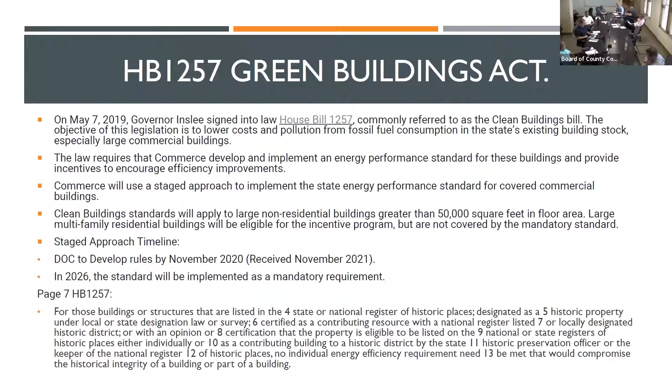Next slide. So we started out doing this - we created a team: myself, Michael, Ken Moore, and Frank from the county projects group. And we're actually working with some of the building owners so we can really see what makes the most sense for the long term.

I have to go back and look at when I came on board here 6 years ago. I had a couple windows replaced over in the Public Works building, and that was 6 years ago. At the cost I had for those, I started working up a project for Scott.

At the time, River City came and did the replacements. I took the number of windows and wondered what it would look like from then till now. So we did a count on all the windows on the south side. If I would have replaced them at that rate, even factoring in a snorkel lift and other equipment, it was going to be about 185,000. I had it quoted, and it was 750,000. That tells you what 6 years have done, especially supply chain wise.

So it's been a huge increase, but I think that's why we really want to take a look at infrastructure wise, what we can change. So we're working on that right now.

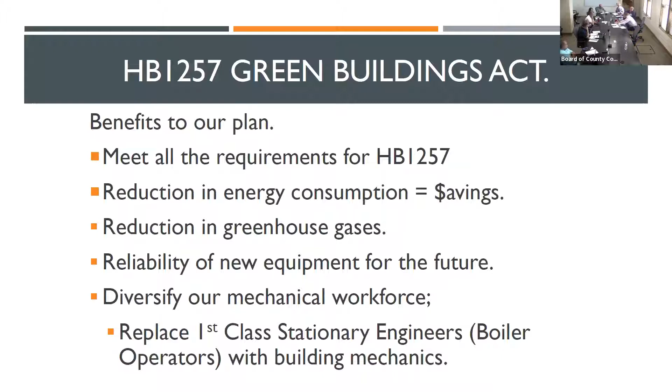We'll take a look at some of the energy systems we really need to address. A lot of these old systems have more efficient alternatives available now. You guys might remember the month-long heat wave we had the summer before last. We slowly started to lose ground on our chillers. Even though we have plenty of capacity, we didn't have enough refrigerant cooling capacity, so we were adding cold city water to our cooling systems and flushing it down the drain just to keep our systems operating and keep the jail, juvenile facility, and courthouse cool. So we've found something there.

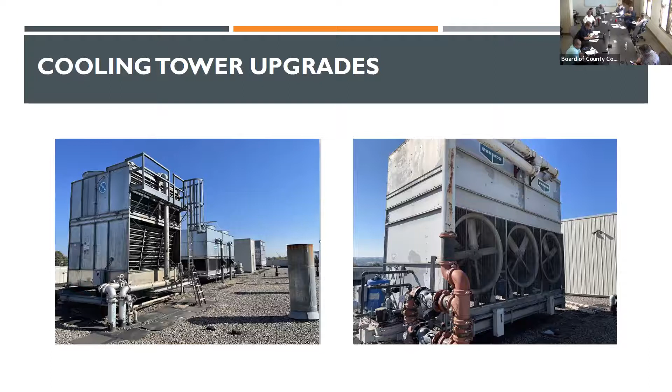The need for steam, like back when we had the old radiant systems, is when they would run 3 boilers constantly. We just don't see that now, but we do always maintain the entire distribution loop at high pressure for a small amount of steam, which is actually coming at a cost. We've tried to go over with the city about potentially reducing the code so we can bring the pressures down. The problem we've found is that the system itself gets kind of cranky when we start cooling it down and heating it back up. So that's why we're looking at replacing these systems.

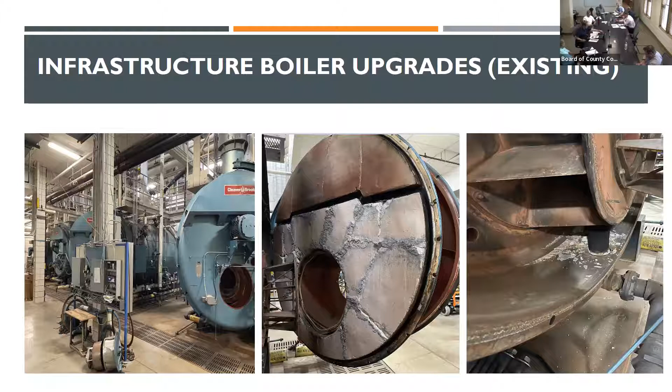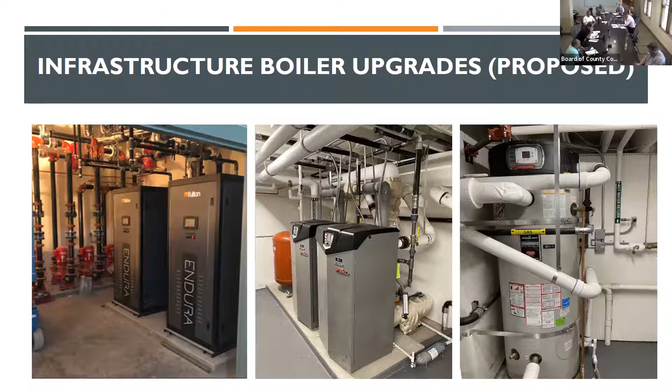Next slide. So what we're looking at are the 2 systems we installed in the medical examiner and the mental health crisis stabilization facility, both just over 20,000 square feet. The systems we'd be looking at are a little bigger, but these are redundant systems, so you're never down—you always have that insurance policy. These systems, based on usage, can throttle way down, stay in a warm-up position, and then react immediately. We can use them to heat hot water. These new high-efficiency units are similar to what's being used in all new construction right now. The best part about this is on the next slide.

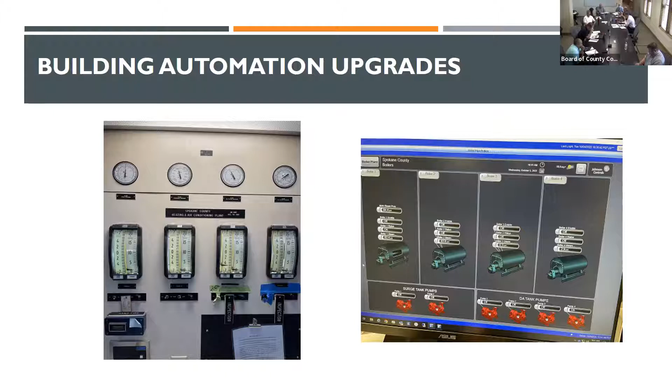6 years ago when I got here, that picture on the left was our building automation system. What you're looking at on the right is where we're at now. We've made leaps and bounds in our infrastructure for the way we monitor our buildings and our steam. We've come a long way, we have really good control, and we're actually looking right now at metering our building's energy usage in real time. We're really getting to that level that we want to be, but we still have some steps that we need to take. Next slide, just want to go over it.

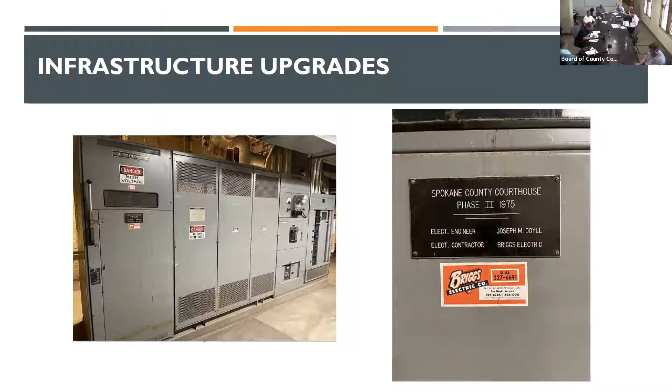Main lobby public works, 4th floor public works. The main lobby public works - we're actually working on a project right now to really see, for public works customer-facing entities, what fits best there and what that would look like. We've got a team together with public works groups, building and planning, and some of the other departments. We're taking a really good look at what would fit best over there.

I have the windows on the south side of public works - they are delaminating. Unfortunately, I did file a claim on it, but it was denied because they're over 25 years old. But I tried anyway. They are starting to fail, but it's unusual that it is mainly the south side ones. We believe the seals on them are breached because some of the tinting is wrinkling, which tells me that we're getting air inside of them.

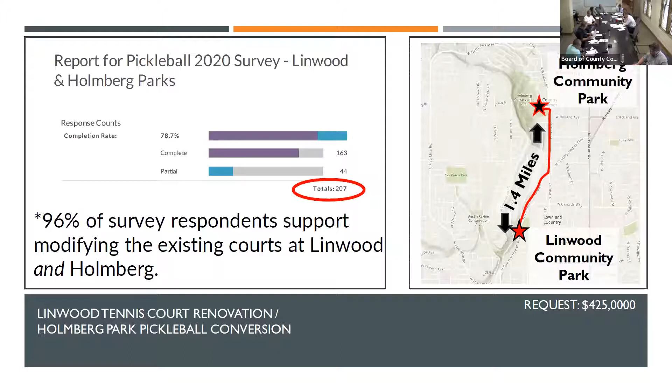And so the project resulted in converting existing dilapidated courts at Holmberg into 8 pickleball courts, and taking the existing Linwood tennis courts and renovating those to serve as tennis courts. These would go where the old pool is at Holmberg Park. Would that be the next phase? That's more of the expanded vision when we get to master planning, but this phase would only work with the existing tennis courts that are there right now.

But yes, in larger plans we've looked at use of the old pool site as having great potential for that. And the folks are very excited, and that was a lot of the feedback in the survey.

Rather than have, say, 4 pickleball courts and a tennis court at each park, the direction from the community is that it would be much more beneficial to have a greater number of courts in one location, looking ahead to even more for tournaments and events. And the folks are really crazy excited about pickleball.

They really are. If you've been out, you'll notice in some stores that just sell sporting goods, you'll see pickleball paddles and balls, which is something I've noticed just in the last year or so. So the demand really continues. As I've mentioned, we've carried this over a couple of years, but the interest continues, the calls continue, and so we're excited to have this on our list for 2023.

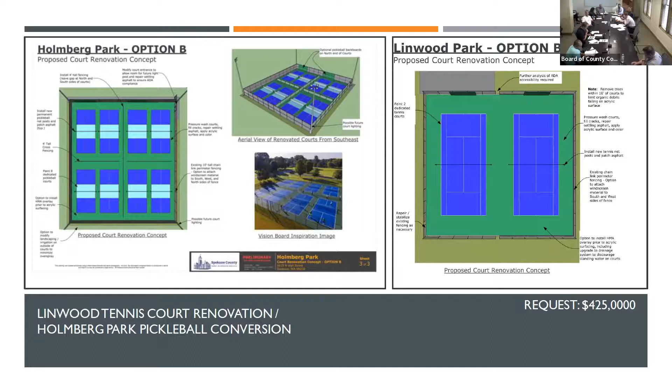Next slide. And that just summarizes the ask there. If this were to be approved, we would start working on the permitting in winter and go forth from there.

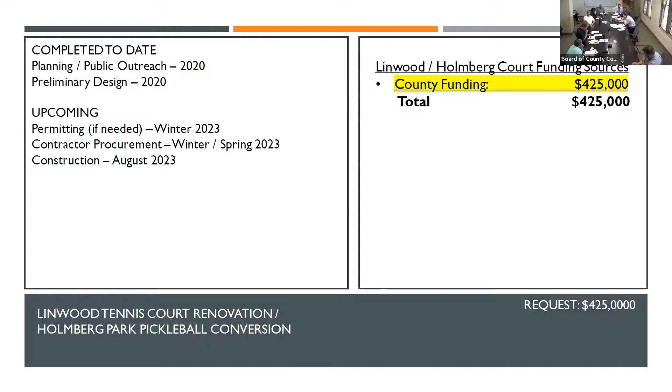Okay. Next project. Looks like I'm up. All right.

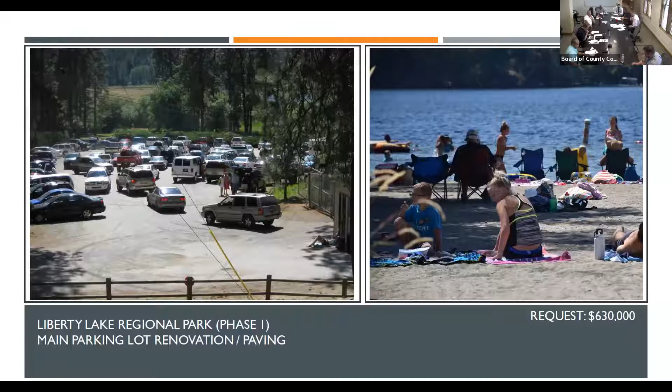So the next project is our Liberty Lake Regional Park main parking lot renovation and paving project, which is a component of our phase 1 renovation out there at the park and a carryover from our 2022 capital budget request. This is our number 2 priority on our list of requests this year.

Next slide, please. So if you recall, back in 2016 we received a $50,000 anonymous donation to fund the development of a master plan for the park. That plan, which was ultimately approved by the board in 2017, included addressing the main parking lot shown there on the left.

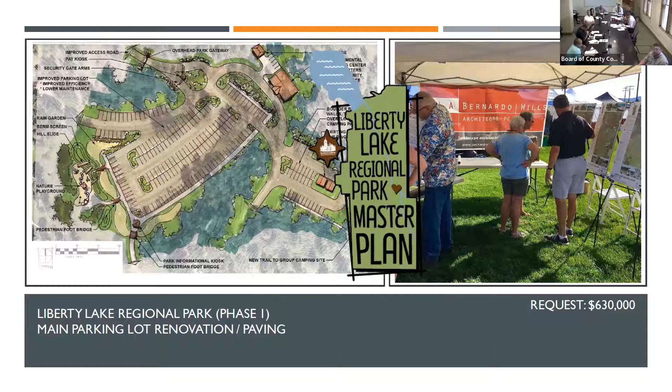Next slide. So in 2020, we developed a grant application to the Recreation and Conservation Office to help fund portions of the phase 1 envisioned improvements, including a new expanded dock, new restroom building, accessibility improvements, and new shade structures at the beach. The main parking lot was excluded from that initial grant application to maximize the competitiveness of our grant submittal.

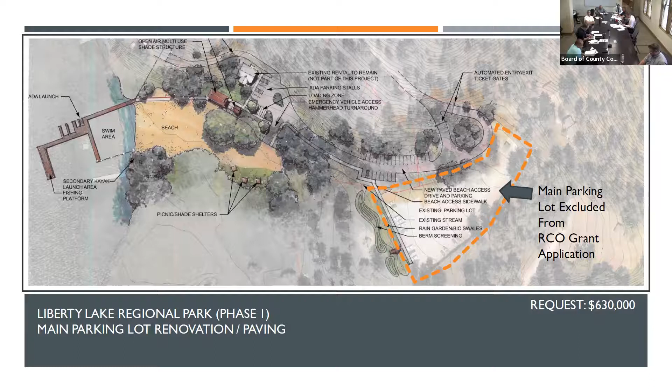Next slide. So earlier this year, the budget office was able to advance us $70,000 of the original $700,000 for the main parking lot budget request to complete design and construction documents for the lot concurrently with the phase 1 design work. So as envisioned, this project and budget request involves paving, striping, curbing, and associated stormwater improvements to support the renovated parking lot.

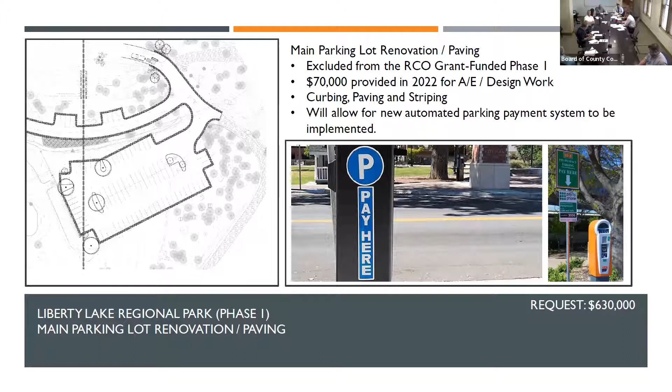Next slide. So we are currently at 30% design with the phase 1 project, while the environmental permitting is moving along nicely. We are anticipating that we'll be in a position to bid this project out in spring of 2023, with construction beginning in mid-August as public use starts to ebb out there. So again, thank you for providing the original grant match funding for the phase 1 project and the $70,000 in design money for the parking lot. With this additional $630,000 request, we will be able to complete this phase 1 project. Any questions on that?

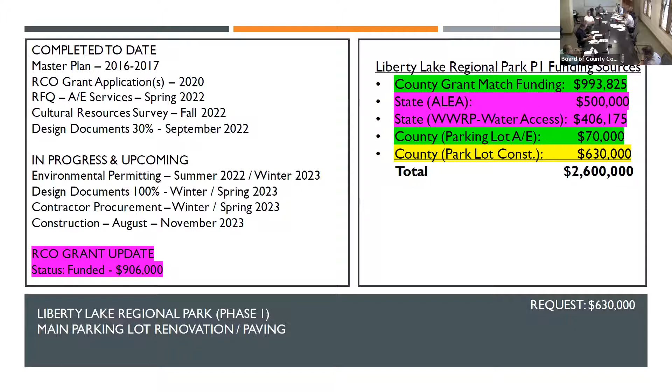Okay. Next slide, Ron. Okay, staying at the same location, this is our number 6 priority on the list of requests. Maybe number 5 now, I don't know, with plans being pulled out.

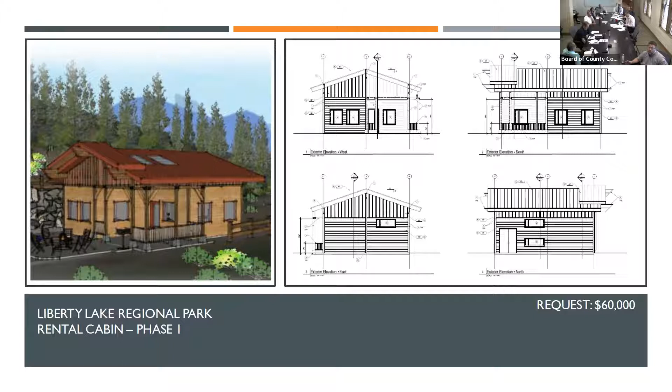Okay, good. So our next request is for funding needed to complete phase 1 work on the newest cabin rental shown here. This cabin was designed by Bernardo Wills Architects and is intended to meet demand for rental cabins at the park. Currently we have 11 tent sites, 20 RV sites, and 4 cabin sites that compose the campground. Per the master plan, we are to continue to provide for a variety of camping options.

Rental cabins are a hot trend for overnight stays, not just through Airbnb but at federal, state, and local campgrounds nationally. Similarly, the Liberty Lake cabins are extremely popular and generate more than double the per-site revenue as RV sites, helping to offset operational costs at the park.

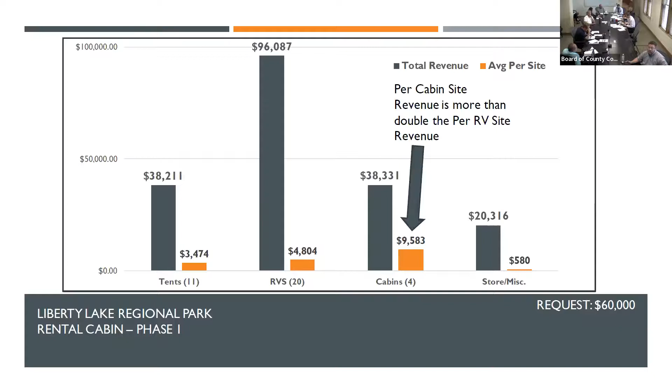In summary, this request for $60,000 will allow our operations division to move forward with phase 1 construction of this cabin, which includes site work, foundation, framing, and weatherproofing. Any questions on this project or request?

Okay, I'm turning it over to Doug. No, Paul, not so fast, before you go. Sorry, I've got a cold, so I'm not talking well. But on the funding, are you looking for general fund dollars, or is this REET 2? It's REET 2, that's what they're signaling. Should we all just say it out loud? Everybody's whispering it, nobody wants to just say it. REET 2, Mary. Like Doug wants to say everything, he's the only one who gets to whisper.

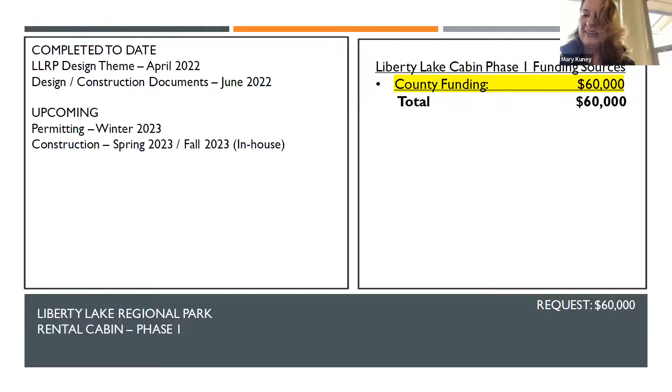Okay, thank you, next slide. I'll start by saying this is the one and only project on our list identified for REET 1 funds. All of the other projects are identified for REET 2. From a priority standpoint, this is our number 1 ranked project.

For the last 25 years, this building has served as the headquarters for the Spokane County Conservation District. Like the land it sits on, this building shall officially become Spokane County property at the end of this month. County Parks is very excited for the opportunity to relocate from our existing administrative offices, located just north of this building on the slide. The new site will provide additional space and is much better suited to accommodate our administrative staff, with storage for existing vehicles and equipment not currently available at the present location. Additionally, the move would help enable implementation of the 2021 master plan for Avista Stadium, which identifies use of the existing admin building as a necessary component to meet Major League Baseball's 2025 mandates.

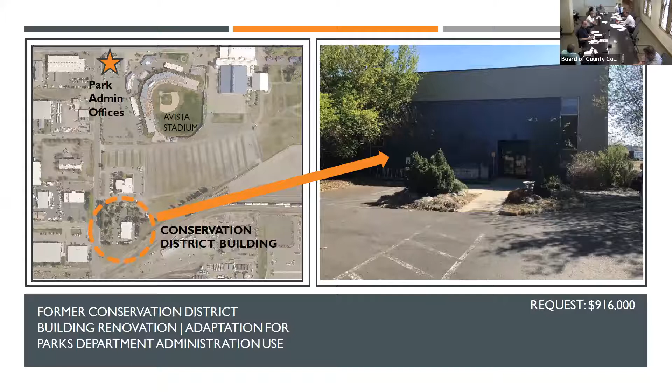Doug, is that the extension branch just directly north of the site? Yes, is that okay? Yes. Absolutely, just wanted to make sure.

While the building itself is in relatively good condition, County Parks has worked together with county facilities to identify improvements needed to clean up and secure the site, to utilize it safely and more efficiently. Much of what you're looking at in this slide would be removed to clean and open up the space. The photo on the left is what you see adjacent, running parallel with Havana there, and some of the other areas.

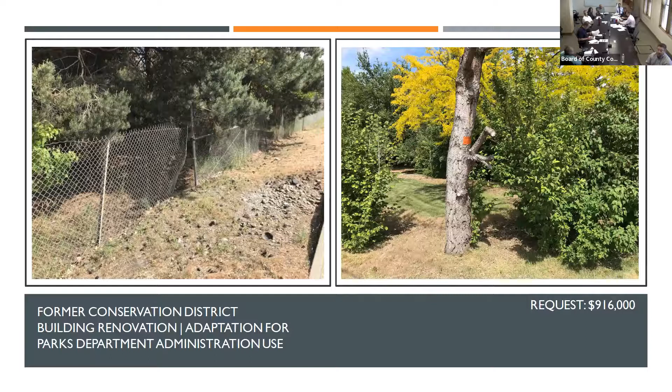This slide just contains a few photos of the existing conditions inside the building.

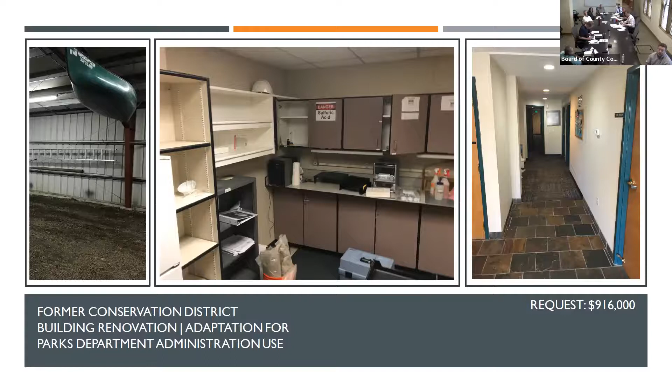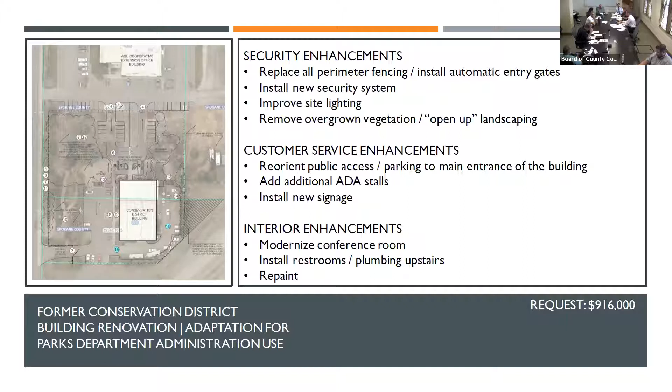On this slide we've outlined several items identified for the renovation. We've put a lot of time into analyzing the space, both outdoor and indoor. Security is a key component here, given the current failing infrastructure serving the site, the fencing, the overgrowth, and the location of the site. We've outlined specific improvements: security on the inside, modernizing the conference room on the main floor as well as on the upper level, where there's an even larger conference room great for public meetings. One thing the building is lacking is restrooms, so we propose installing restrooms on the upper level to serve the conference room and office space there, plus a basic repaint, since overall the building is in pretty good shape.

In summary, the ask is for $916,000 to allow us to move forward with this project, and we'd look at moving right away. We're in conversations with facilities, given that the site's being turned over to the county, and we're hoping to move forward sooner rather than later on general cleanup of the overgrowth, working with Gil. This would be a general fund building that facilities would essentially maintain, so we work closely with them and would continue to through the improvements. Happy to answer any questions on this project.

Doug, would there be any other people occupying the building? We don't have others at this point.

We've looked at a bigger picture that could potentially allow for a centralization of operations, or short term, there could be some ability to house additional persons at the site. So it really allows a better space for our current employees and for future either expansion or consolidation.

And how long will it take physically to move you from where you're at to the conservation building? I think when we drew out the original timeline, we were targeting 3 to 5 months. A lot of that depends on availability, but there's a lot of small projects and expertise, like the security fencing and security enhancements, where we would be able to utilize the small works roster rather than one large project bid out. As we talked to them and looked at this project, we would see a series of small projects, so that could allow it to proceed more quickly.

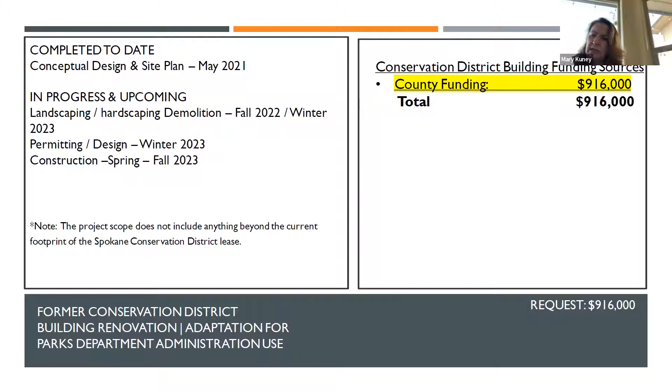And partly was the vandalism that was partly when it was empty versus when they were occupying it? Is that correct? That's what I understand. No, a lot of it, and some of the challenges Gary has had, have been while it's occupied.

Either vehicles where the gas tanks are being drilled into and drained, or other challenges Gary's recently had over there at the Cooperative Extension, with folks walking outdoors and being confronted by individuals that don't have business there. They've had some vandalism to vehicles during daytime operating hours, as well as off hours. So there's been a steady increase of vandalism and criminal activity, and we have tried to plan accordingly to provide a safe and secure environment for staff to work in. Thank you.

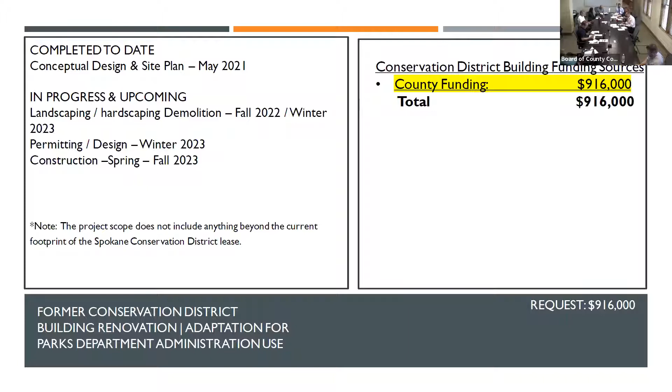Okay, on to the next. I think we're ready.

Okay, Bear Lake. This is our number 3 priority in the list of requests this year. This funding request is associated with a local grant match requirement for a grant application submitted to the Washington State Recreation and Conservation Office to help fund shoreline renovation and enhancements to Bear Lake's east and west shoreline areas.

You may recall that back in 2020, we installed fencing to block off public access to most of the west shore to address risk management concerns associated with gabion basket retaining walls that had reached end of life.

As a reminder, this is a heavily used regional park in North Spokane County with over 700 vehicles entering the park daily during peak summer months. It is the only public lake access of its kind in Spokane County north of the Spokane River, with other lake access points in this part of the county being for boat access only. So it's really important to this part of the community up there.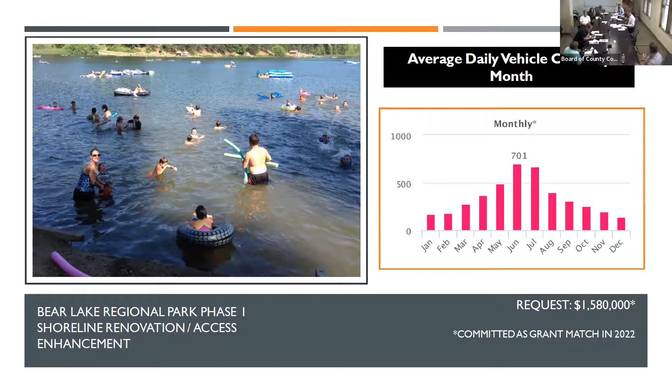Throughout last year, Julie Neff in our office did a great job leading a master planning process to develop a phase 1 master plan for the park focused on the shoreline areas to get us to a grant application ready status. Through that process, there was extensive public input solicited through an on-location meeting as well as several online surveys, as you can see here.

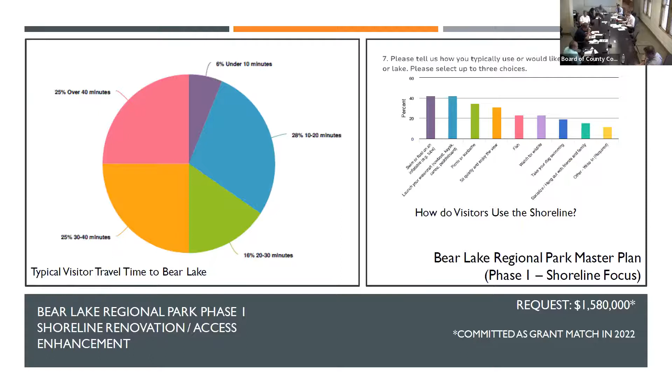The community preferred design includes significant public access improvements to the east and west shoreline areas, including removal of the failing gabion baskets along the shoreline, enhanced lake access for swimming and viewing, expanded fishing piers, and a new non-motorized watercraft launch.

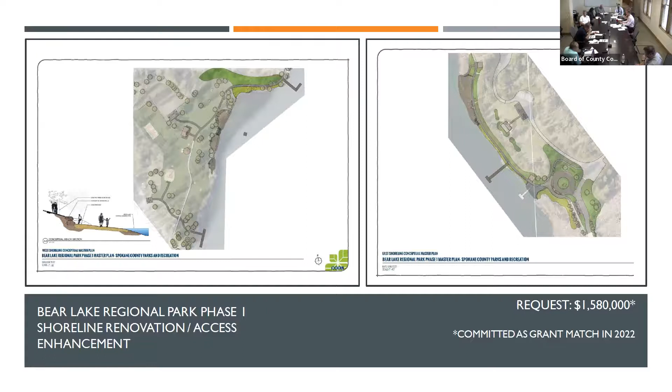With the phase 1 design at 60% and environmental permitting well underway, Julie was able to submit a very competitive grant application to the Recreation and Conservation Office, which is currently ranked 8th out of 25 projects within the grant category and within the funding range that we anticipate. Providing this committed match funding in 2022 will allow us to advance the design documents to 100%, secure that permitting, and put the project in a position to be fast-tracked for this grant funding.

Any questions? One element to mention for the grant funding is whether you're ready to go.

Yeah, so that's something that we found out recently - this state grant funding source is land and water conservation funding, so it's a federal funding pass-through. What the state does is look at projects within the full 2-year range of funding and fast-track those that are ready to go from a permitting standpoint. That's why we would like to get the ball rolling, because otherwise it would potentially push that federal funding to 2024, and we wouldn't be able to begin construction until probably fall of 2024.

Any other questions? Okay, so you're looking to try to get that identified sooner than later, the 1.5?

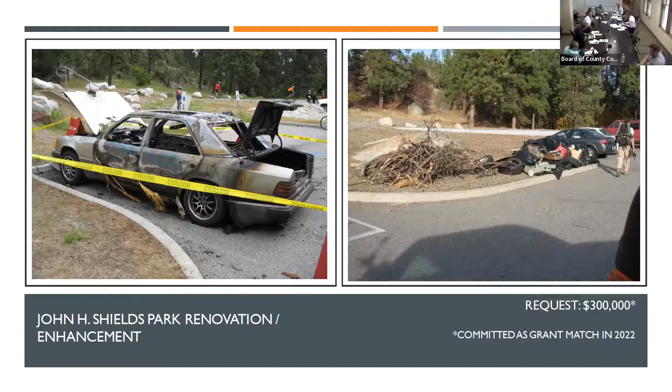All right, next slide please. So this project provides low-hanging fruit opportunities to address accessibility, connectivity, and activating space currently seeing misuse and causing some security issues out there. As you can see here, connecting the park with the Centennial Trail is a pretty straightforward project that's supported by our Public Works Department.

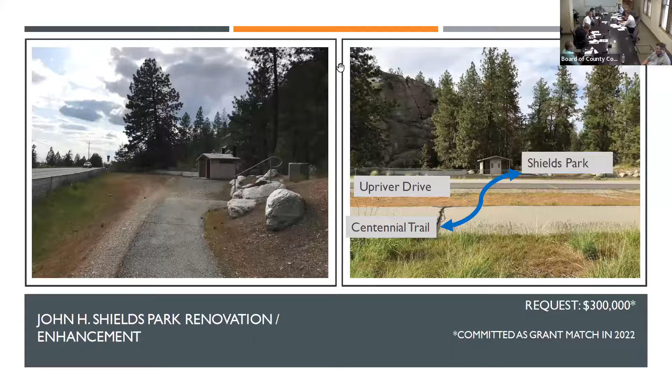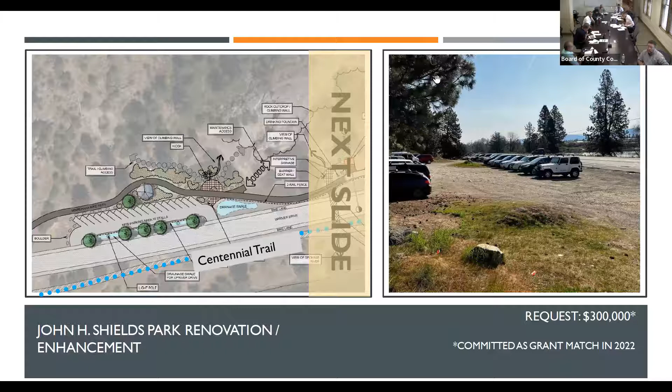Next slide please. In 2021, we pursued development of a master site plan for the park with significant outreach and feedback from stakeholders. Focusing on the west side of the park, the vision improvements include creating an improved parking lot with lighting and connecting the growing neighborhood to the west with this park, where currently the situation is an undeveloped gravel parking area that has become an attractive nuisance over the years, with people setting up fruit stands, dumping derelict vehicles, and dumping 55-gallon drums of untreated sewage.

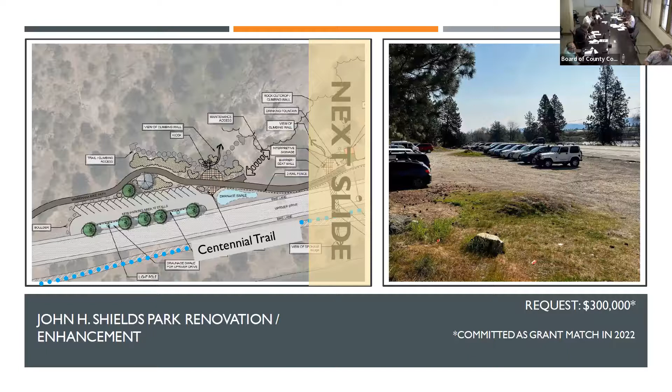The list goes on, so it's a fun one for our operations division. Next slide please. Moving east along the park, along Upriver Drive, we will focus on creating connection with the Centennial Trail, enhancing accessibility throughout the site, and installing a bouldering playground to activate the space that often sees negative activity. That's a cool opportunity to connect younger folks with the climbing opportunities afforded at Beacon Hill and Shields Park in particular.

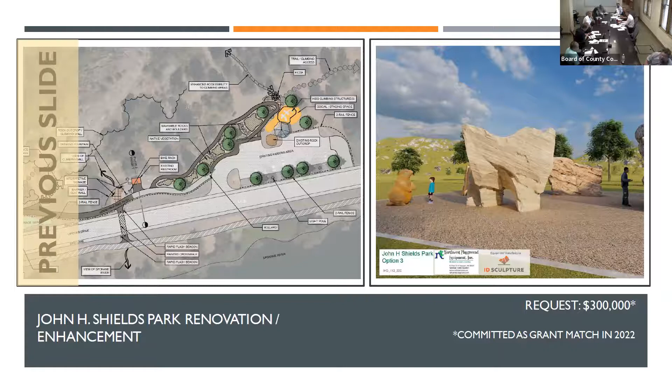Next slide please. At this point, we've partnered with the City of Spokane Parks and Recreation Department to develop a joint grant application to the Recreation and Conservation Office that combines our project with their Camp Sekani parking lot renovation project. That grant application has had significant community support, including $185,000 in private donations, and is currently ranked number 5 out of 25 in that same category as Bear Lake, well within the anticipated funding range. The requested funding of $300,000 for the county's grant match will leverage $1.8 million of private, state, and local funding. Any questions on this project or funding request?

Okay, and we'll skip the next 3 slides, Doug? Oh yeah, that's all me. It's good, it's good. So that's the exciting, there we go, thank you. So the stormwater project, we will be talking to Jeff about ARP funds, and maybe we won't even have to come back to you. It looks like it might line up with one of the current categories.

Jumping to our last, this is our number 7 ranked request, and essentially it's some funding for contingency. Several of the projects, as we mentioned earlier, were adopted and rolled forward in the 2022 budget. Given some of the volatility in the construction market, there could be some growth or increase, and having a few dollars to serve as a contingency for all of these different projects would be very helpful. It's also identified for the unforeseen, because despite our best efforts, we occasionally have some type of system failure with the infrastructure. With 15,000 acres, we have a lot of different facilities, so it can be helpful for that unforeseen as well. We've identified those dollars with that in mind.

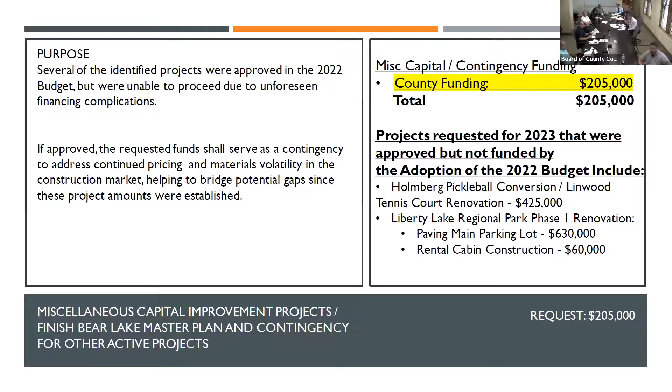And with that concludes our presentation. I don't know if it would be helpful to go up to our second slide that summarizes all the projects and the amounts, and happy to answer any additional questions that you might have.

Again, deleting that Plante's Ferry stormwater NPDES compliance request. Doug, if I may take the liberty to summarize the 2023 request: in total, you're looking for $6,559,000. Of that amount, $2,443,000 comes from grants, so you're looking at a request of $4,116,000. Of that $4,116,000, REET 1 is $916,000 and REET 2 is $3.2 million. Exactly, yep, and that's the number we estimated as the capacity each year in REET 2 at this time. Correct, we have very intentionally landed at that amount when we subtract the project that shouldn't be on the list. There are other projects we're pursuing other funds for, but today we're speaking specifically to those we're requesting through the capital budget process. We appreciate the opportunity to share these with you and make the request.

I've got a request for the team. On the 6-year plan, for each of the projects where there are multiple funding sources, break them out. I think I've made that request to you already. The larger spreadsheet we have, we can absolutely share, it's just hard to get it in a printable, digestible version so the commissioners can see it at a glance.

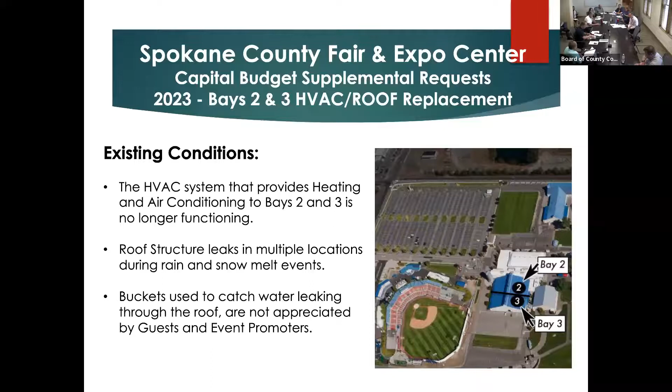So a little bit of background assessment. Next slide, please.

The 2 buildings, bays 2 and 3, are some of our heaviest use spaces. They make up about 35,000 square feet of space, and there are 5 rooftop units that service these 2 spaces, located up in the cupola, which you'll see at the top of the picture. It's a little bit tricky to access those units, but as I mentioned, they are no longer functioning. Earlier in the year—next slide, please.

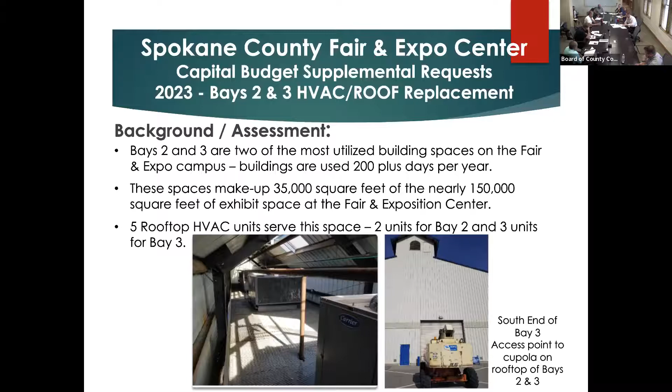We worked with Bernardo Wills to put together a proposal and some recommendations, and they came back with a 2-phased approach. Phase 1, removing the HVAC system and the cupola on the top of the building, coming in at $1.5 million. Next slide, please.

And then the second phase is replacing the roof, coming in at over $3 million. So our total for this proposal from Bernardo Wills came in at $4,650,000.

Since then, with the help of Doug and his awesome knowledge in these projects—we've never taken on anything quite this big at the Fair and Expo in regards to a repair—you did some reaching out, and we had a fabulous meeting on Friday with the Garland Company. So I'm going to turn this over to Doug now.

Great, next slide please, Ron. Okay, so following our visit with the board in July, we were able to go back and contact the Garland Company, and they specialize in these types of projects.

They have been approved for the Omnia contract, which allows us to work directly with them on anything related to water damage and water leakage.

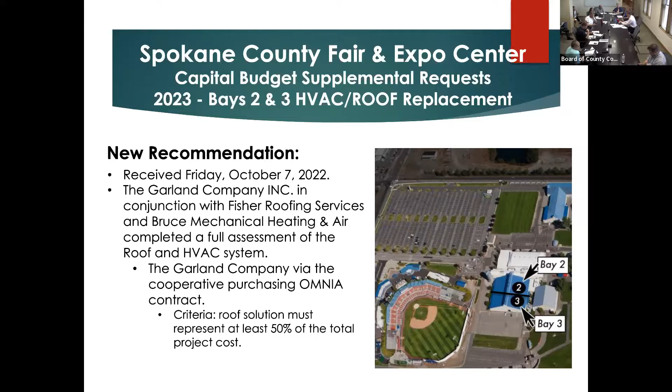So basically jumping to the preferred recommendation, they identified several, and we'll speak to a few of the others, but the top recommended would be a standing mechanical seam retrofit. It has a 40-year life expectancy, and this would come with a 30-year no dollar limit warranty. So basically a bumper-to-bumper warranty. If anything should happen, it would include labor, materials, everything needed to address or replace the roof within that 30-year period.

You can see this particular method, they would go over the top of the existing roof, and it allows for insulation. In this photo they show, that's something that could allow that to happen. Again, there are bullet points on just the pros of this particular system that led to its recommendation. They looked at one other option that would be a complete tear-off that would have been significantly more expensive, so they didn't even price that one.

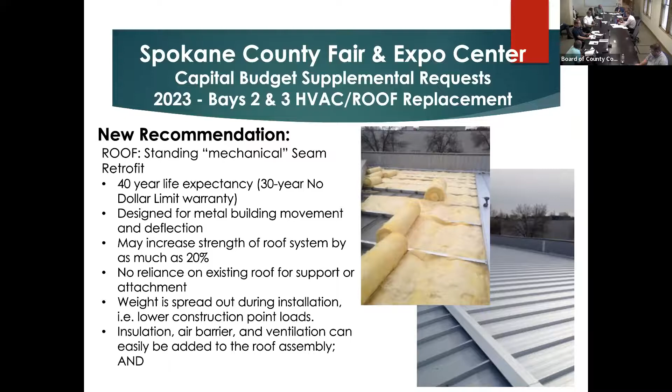So that's it for the 4 slides. If there's any questions—if not, Erin has additional slides. So just a second, Doug.

So on the HVAC units, are those going to meet the new energy guidelines and efficiency? Yes, they would do that. These are natural gas units on the heat side, if I recall, and we'll continue to work with the contractor and facilities to fine tune the specifications and make sure we're hitting the mark with energy efficiency on the units as well as the insulation. So there's an opportunity through those units. Both the roof and the HVAC provide opportunities to maximize energy efficiency.

We're anticipating a really long lifespan for these buildings. I assume there will have to be something calculated as far as some sort of enclosure or security around the units if we're going to have them on the ground. We have talked about that, yes, maybe some sort of wrought iron enclosure or something around it. When might you have the roof specification handy? In the near future, but I know a lot of commercial buildings, they come in one day and all of a sudden it's really hot on a summer day, and they go out and it's because somebody ripped out anything they can get money for.

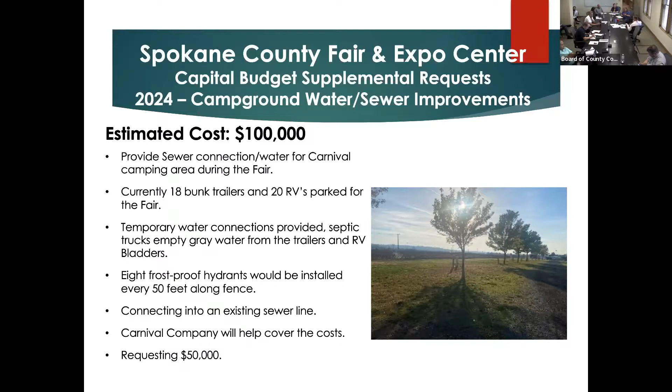So that's a high priority. We're seeing a lot more campers that are just passing through the area that want to stay with us, and we've seen a lot of growth. So we're encouraged by that, but if we could improve our amenities, that would be helpful. Next slide, Ron.

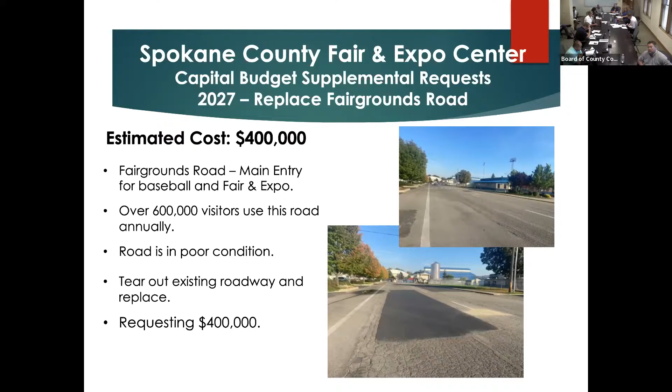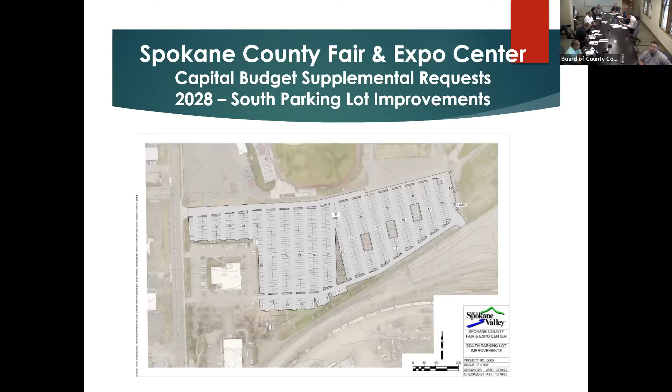It's a two-phase process, at least in this initial proposal. It's close to a $4 million project to do all of the things that need to be done there. Phase one includes grading the site, getting that underground infrastructure in place for lighting and irrigation, graveling, and swale construction. Phase two would be the actual paving of the site, painting those parking spaces, reconstructing the perimeter drive aisle, adding curbing, installing lighting, and all the landscaping features. So in the future, with the expanded use of our campus, between all of our partners, that would be a really nice amenity to have.

So I know I cruised through those pretty darn quick, but any questions? No, I'm good.

So, sorry, I guess I do have a couple questions. You're looking at those as kind of just out in the future. Is there potential for revenue savings from you guys, excess revenue that could help pay for some of those?

We are working on that, Mary, in our capital planning, and Bill, our finance person, who's here with me, is definitely looking to see how we can carve out and set up a capital budget moving forward to help support these projects.